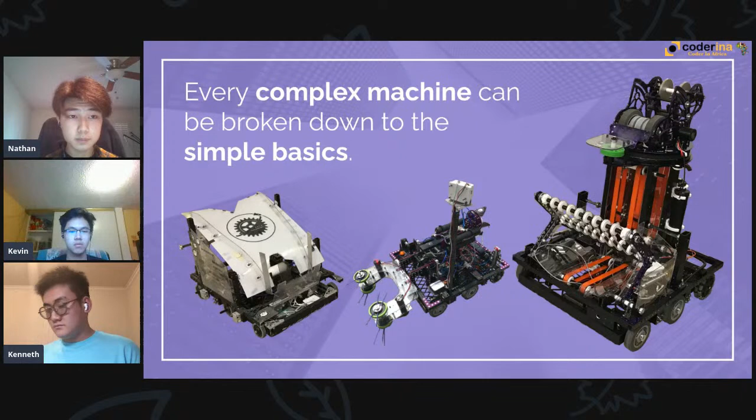Whenever we design our robots, we have to think about the basic mechanics of each robot. While these robots may seem really complicated at first, once we get the basic mechanics down, the rest of the process becomes a lot easier. So with that, I'll be talking to you guys about simple machines. Here's a short video of what one of our robots did last year. This robot was designed to shoot balls into a port.

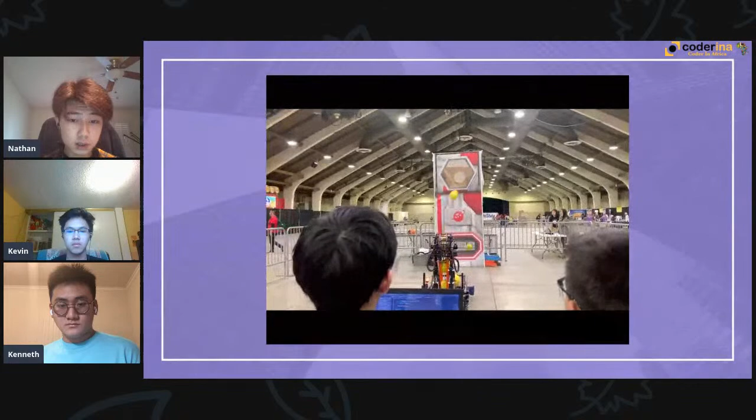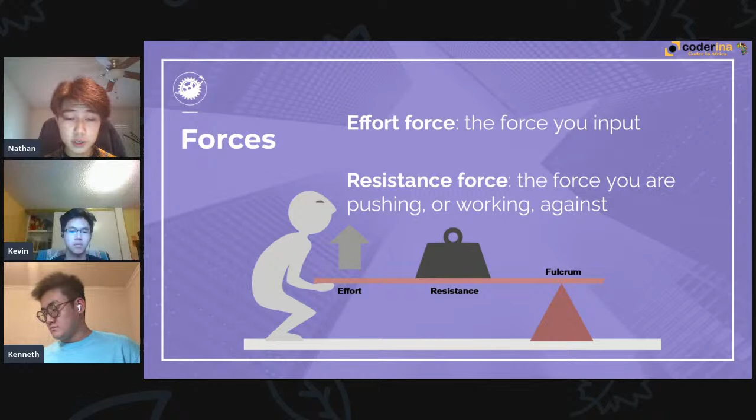We'll begin today's presentation by talking about forces. There are actually 2 kinds of forces. We have the effort force, which is any force that you put into a system, and the resistance force, which is the force that you are working against. In the picture below, the effort force is the person pushing up, while the resistance force is the weight pulling down on that person.

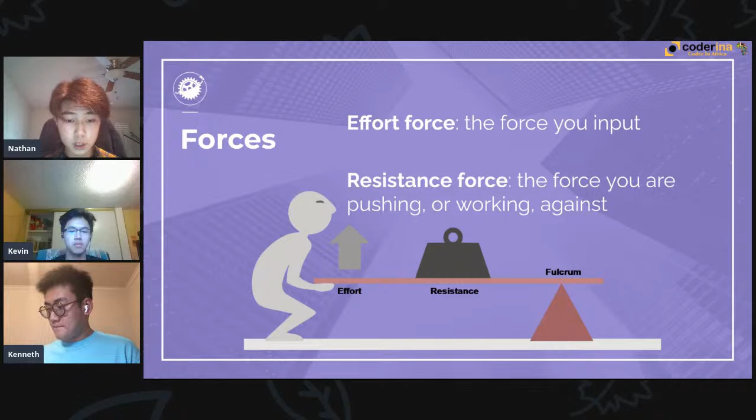We'll also talk about simple machines. Like Kenneth mentioned earlier, simple machines are the foundation to designing. Your door, your fan, those are all simple machines. They exist in everyday objects, and they're really important for our design process. Say you try to open your door where the handle is. That's pretty easy, right? That's what the door was designed to do.

But as you move your hand closer to the hinges, opening the door becomes much harder. That's what simple machines try to make easier. They make everyday tasks require a lot less force. Basically, they change the distance to change the direction or magnitude of the force required.

There are 6 kinds of simple machines: the lever, pulley, inclined plane, screw, the wedge, and last but not least, the wheel and axle.

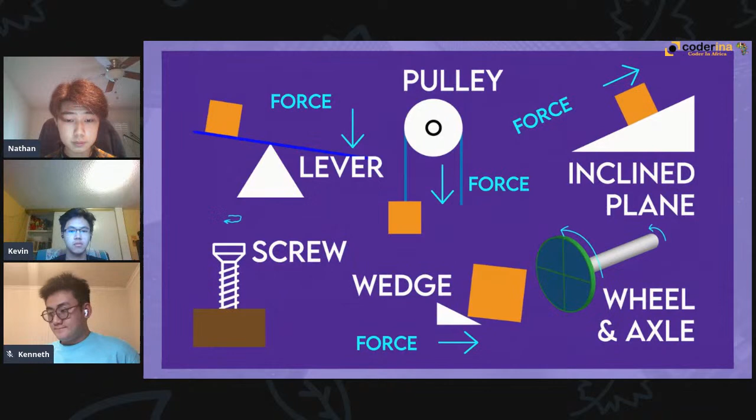And so work. What is work? Well, whenever you do something, you have to work to do it, right? Well, in design, work is simply the amount of force that you apply over a set parallel distance. And so in a simple machine, the work will never change. However, the amount of force or the distance needed to travel will change within work. So simple machines make it so that you can apply less force to make something happen while increasing the distance. And this makes it easier on the person using the simple machine to complete the task that they're trying to do.

And with that, we can now understand what mechanical advantage is. So mechanical advantage is basically a value or a number that tells you whether or not you're using more distance or more force when completing a task. A task has a set amount of work. So again, that amount of work will never change. But having a high mechanical advantage means that you're using less force, but increasing the distance that you need to travel to complete the same task. And vice versa, having a smaller mechanical advantage means that you are increasing the force needed to do something while decreasing the distance that you're traveling.

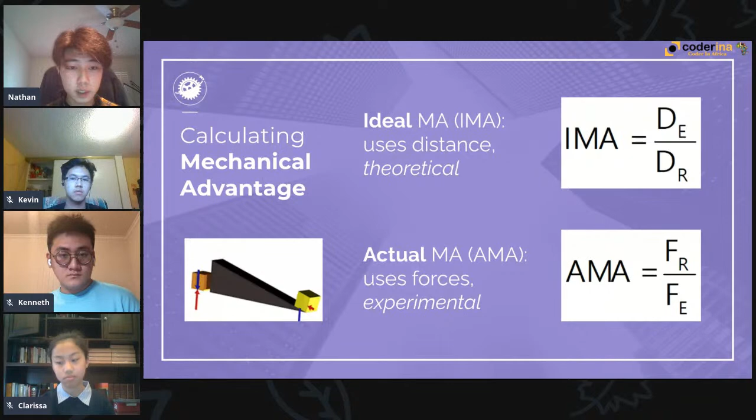And finally, like when I mentioned IMA and AMA earlier, we can actually use these two values to calculate the efficiency. So essentially, efficiency is just comparing how much work you put into something and how much work you get out of it. So it's like describing the amount of effort you put into making something work and how much of the effort that you put in actually gets contributed to your final result.

So let's think about it like boiling a pot of water. So if you pour some volume of water in a pot, you have that initial amount of water, right? After you boil the pot, some of the water will be evaporated and get lost in the air. So while your final result is that you still have a boiling pot of water, you won't have all the water in there that you initially poured in. So in the same way, it kind of works with energy, where not all the energy that you put in a system is contributed to the end result. So for any system, it's basically impossible to achieve maximum efficiency or 100% efficiency.

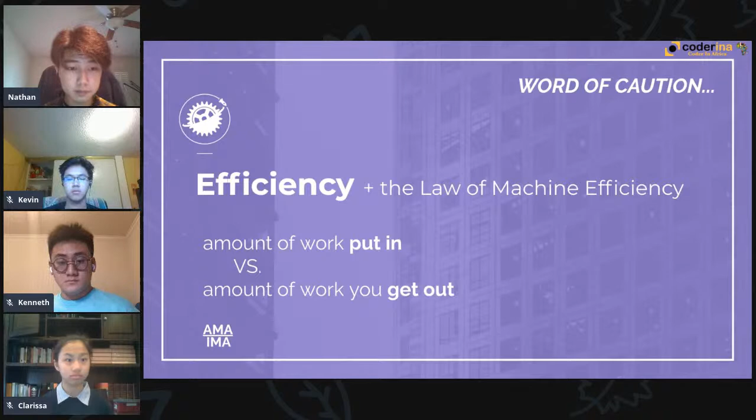Okay, hi guys, my name is Clarissa, and today I'll be going over the 6 types of simple machines with you, and Kevin will come in every once in a while to show you examples of simple machines on our robot. So to kind of recap, work is anything that you're trying to do. So like if you're trying to move a rock from one place to another place, that's an act of work. And mechanical advantage tells you, when you're doing a certain amount of work, will you be using more distance in the process or will you be using more force in the process? So it kind of tells you that comparison. But yeah, with that, let's get into it.

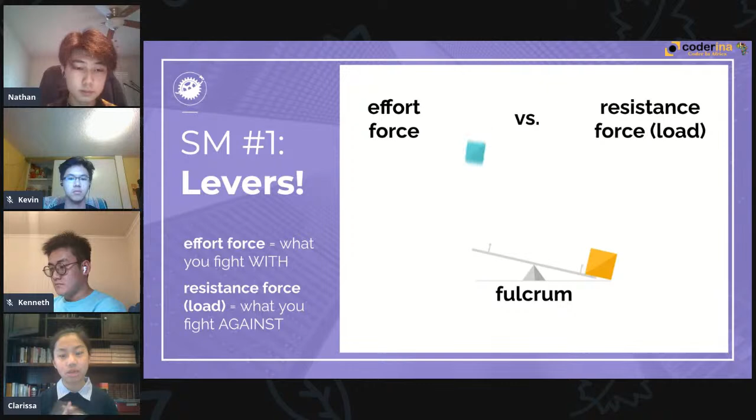So our first simple machine is levers. Levers come in 3 parts. You have your effort force, resistance force, and your fulcrum. A resistance force, in parentheses over there, is also called your load, because when you're carrying something, it's a load, right? So those 2 words are interchangeable. Our fulcrum in the center bottom is our pivot point of the lever. It's the point where the force kind of circles around in a lever. So if you remember, your effort force is basically the force that you will fight with, whereas your resistance force is the force you're fighting against.

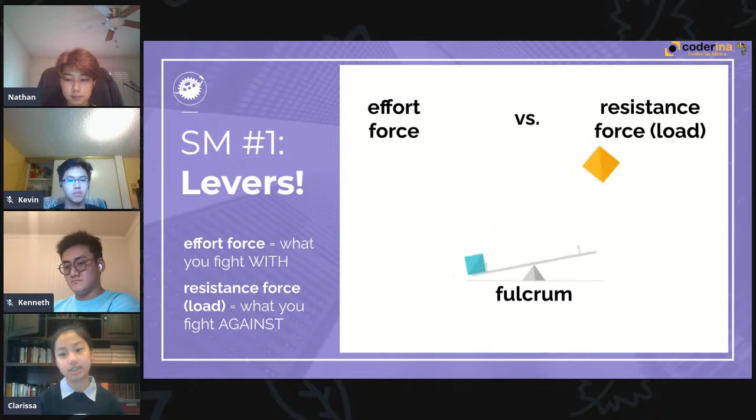So in the example of the little cute GIF in the middle, the blue and orange boxes are both effort forces and resistance forces. It just depends on the time they're slamming down or the time they're being lifted up. When they're slamming down, they're the ones putting the force on the system, so they would be the effort force. Whereas when they're being lifted up, they're providing resistance. They're the load, so that's the resistance force.

So next, we have our 3 types of levers: first class lever, second class lever, and third class lever. All these levers are based on the relative positions of the forces, and that sounds a bit complicated. So the way we like to think of it is just look at whatever part is in the middle. In the first class, you can see that the fulcrum is in the middle. In the second class, the load is in the middle, and in the third class, the effort is in the middle. I'm not sure if you guys can see the words, but red is effort, the fulcrum is the triangle, and the green is the load.

So what that means is not all levers are going to look the same, as you can see by the examples on the bottom, but you can kind of figure out what it is. So for the first class lever, again, the fulcrum is in the middle. And going back, mechanical advantage can be calculated as distance to your effort force compared to your distance to your resistance force. In this diagram, you have the fulcrum in the middle, your effort force on one side, and your load on the other side. Since it's calculated as distance to the points, mechanical advantage can really vary for a first class lever, because you can have your effort force really far away, or your load really far away. As long as you put one over the other, you calculate the mechanical advantage. So it's really variable for first class levers. It can change depending on where the forces are placed.

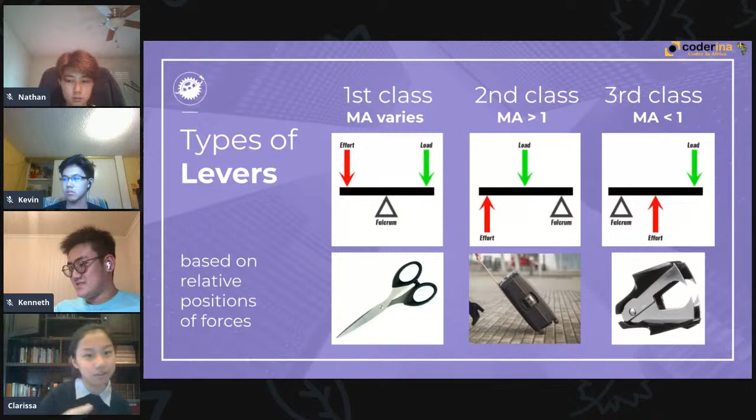So what that means is that for a certain amount of force, say you have like 5 pounds of something, then you'll probably need more than 5 pounds to carry that 5 pounds because you're closer to the fulcrum. You're trading more force for less distance to the fulcrum. Yeah, it's kind of like just a trade-off.

So now we're gonna be playing a quick game of guess the lever. So in the comments, I want you guys to just spam what you think the lever is.

And before we start, it's kind of helpful for you guys to draw a force diagram. So you might be asking, what's a force diagram? A force diagram is just a basic drawing that shows where the forces are acting on a system. So if you have a notepad or something you're taking notes on, you can draw a line on your paper to act as the wheelbarrow over here, and I'll help you out

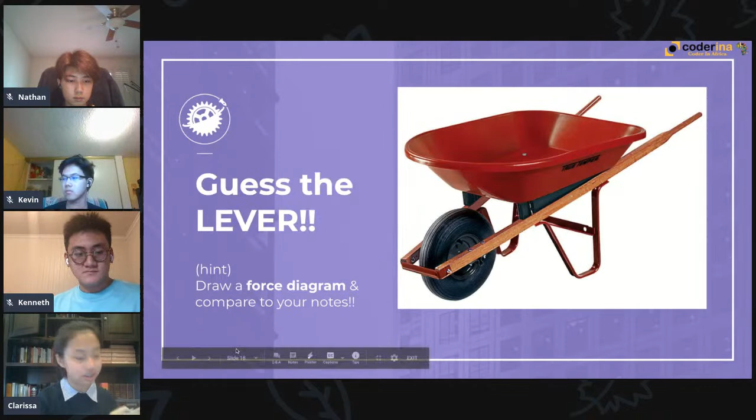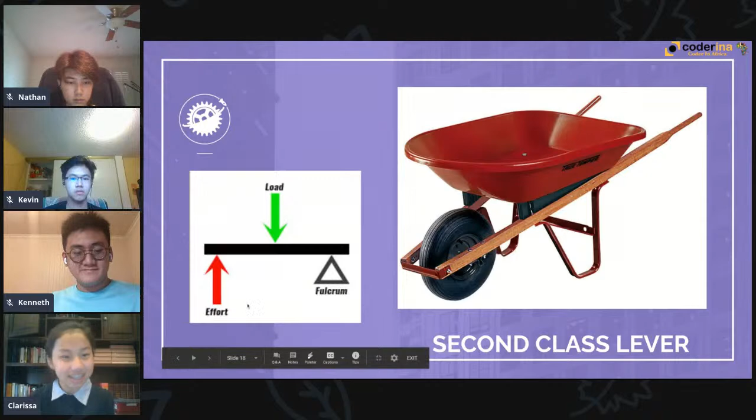for the first one. So in the first one, on the far left, you can draw a small triangle underneath the left of your line, and that will be your fulcrum because the wheel is the fulcrum. And in the center, you draw an arrow from the top because that's your load, and then on the right for the wheelbarrow, you draw an upwards arrow because that's your effort. Then you can label them effort, resistance, and fulcrum, and hopefully, based on your notes, you can infer that this is a second class lever. So yeah, I saw a lot of you got it right, so that's great. Okay.

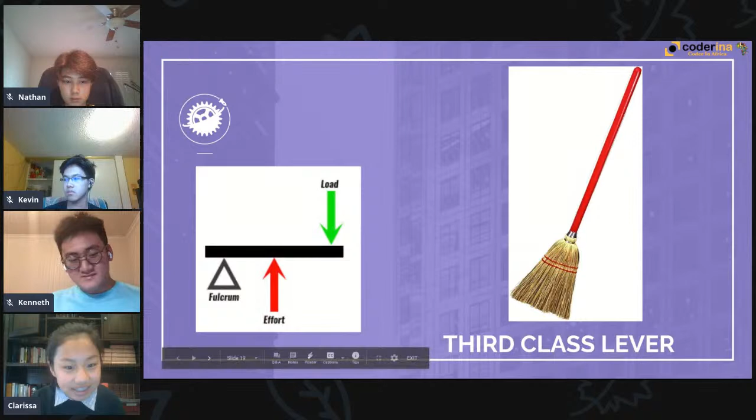Well, you guys can guess this one, or you might have already seen this. But guess what this is? The fulcrum is at the very top, the resistance force is at the very bottom, and the center is where your hands are, so that's the effort force. Yes, this is a third class lever. Okay.

A crowbar. Can any of you guys guess what this is? So for this one, you have your fulcrum at the very bottom, where the end of the crowbar is, and then you have your resistance force at the next corner, if you see the small corner leading up to it, and then you have your effort force at the very back where you're pushing down.

There's a lot of varied answers for this one. Some say third, some say first, and some say second. Interesting. Yes, but this is a second class lever. Make sure to compare it to your force diagrams, and you guys can always go back later.

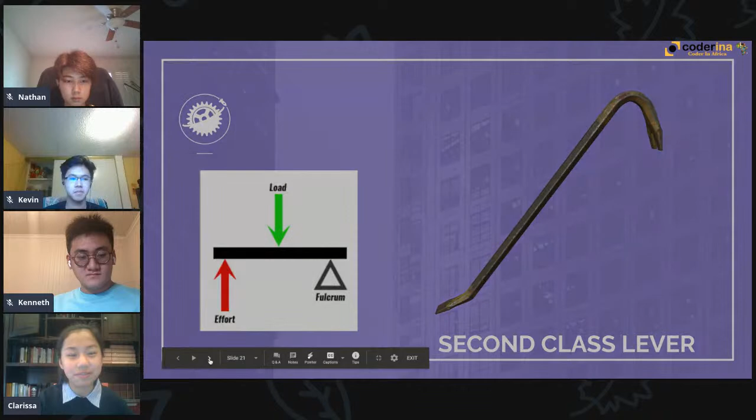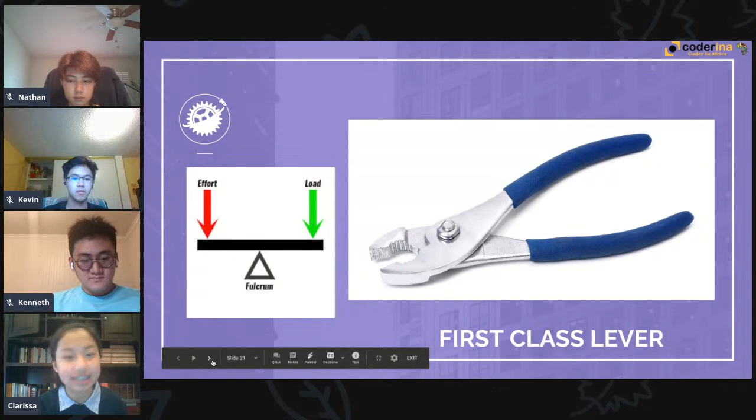Okay, this is one that we kind of mentioned earlier, but hint, hint, it's kind of like scissors, right, if you think about it. So you have your effort force on the right side, your resistance force on the left side, and the fulcrum in the middle, so this would be a first class lever. Hope you guys got it.

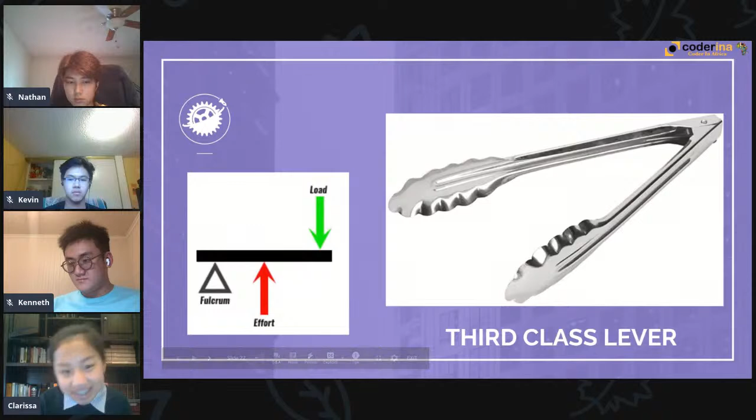Okay, well, this is our last one, and it's kind of tricky, but the fulcrum for this one is also at the very bottom of the fishing rod, and then where your hands are, that would be where your effort force is, and then at the top would be your resistance force, where you're pulling back your fish, right? So your center is the effort force.

Center is effort force. There's only one of them. That is a third class lever. So to all of you guys who got it right, congrats. To all you guys who are trying, there's a lot more examples out there, and it's a work in progress. Don't worry, it took me quite a while to absorb everything, so don't worry about it.

Okay, before we move on, there are two more technical definitions to add to your list. First of all is your torque definition. So torque is a force that creates rotation or torsion, which is a twisting force. So this kind of relates back to our lever because our lever, remember, has a fulcrum, so stuff can twist around it. So that's how torque relates back to it.

Moment is actually more broad than this. There are different kinds of definitions depending on where you apply this, but in context for what we're talking about today, moment is something that measures torque. Moment is calculated by distance times perpendicular force. And if you remember, work is distance times parallel force. So it sounds similar, but it's not.

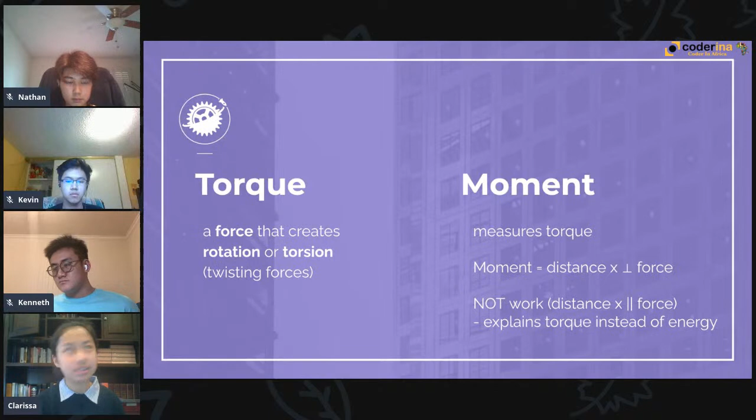Yeah, so moment explains torque, so a rotation force, right? Whereas work explains the process of doing something, right? Work is work. So work explains that process. So don't get them mixed up.

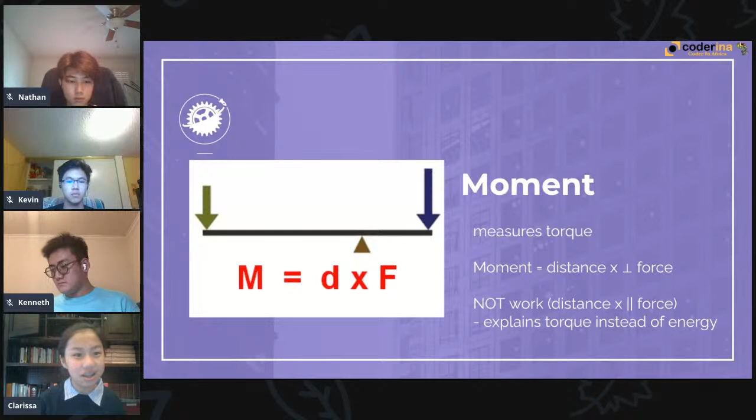If you can see by the diagram, moment equals distance times perpendicular force. So if you see the lever, it's a perpendicular force. If you guys don't know what perpendicular force is, it's 90 degrees. Yes. Hopefully that makes sense. Okay. Oh, and to the person in the comments wondering if that picture was a first class lever, yes, it was.

So our second simple machine, I mean, that was a lot, right? But we're only on our second simple machine, is the wheel and axle. I'm sure a lot of you guys are more familiar with this because we probably see wheel and axles in our everyday lives, right? So in a wheel and axle system, the axle is always the smaller rotating part. And then the wheel would be the bigger rotating part.

A wheel and axle system is based on the principles of a lever, if you can see by the picture on the left. So you see the pink arrow is the force from an axle, and then the blue arrow is the force from the wheel, right? So either you can drive the wheel and make the effort force that blue arrow, and the resistance force the pink arrow. Or you can flip it around and drive the axle. So in that case, the effort force would be the pink arrow, and the resistance force would be the blue arrow. So there's a lot of ways to play this out.

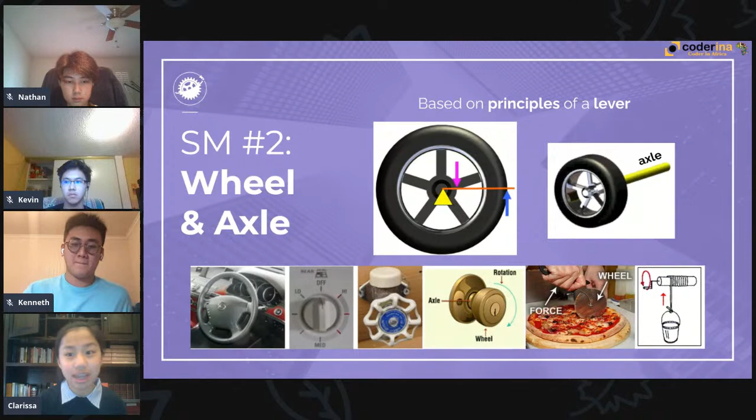So if you can see on the bottom, there's a lot of different examples of wheel and axle systems in everyday life, from a steering wheel to a doorknob, even to a pizza cutter. There's a lot of ways that it's used. But yeah, let's move on to calculating mechanical advantage for wheel and axle systems.

Okay, so again, for calculating mechanical advantage, you can use distance or forces, because if you remember what Nathan talked about earlier, ideal mechanical advantage uses distances, whereas actual mechanical advantage uses forces.

So our first one is when you're basing your wheel and axle off of a third class lever. If you use the picture on the left hand side, the effort force should be closer to the fulcrum than the resistance force. This kind of relates back to your force diagrams, right? So your effort force would be that pink arrow, and your resistance force would be the blue arrow.

So take our picture, the wheel, right? So in the wheel of a car or a truck or anything, you have the axle in the middle, driving the wheel. So the axle would be the effort force, and the wheel would be the resistance force, or more like the wheel touching the ground. That would be your resistance force.

You're fighting against that. Okay, so remember, third class lever is an axle driving the wheel scenario. That means the effort force has to be a lot more, because imagine trying to move a car, right?

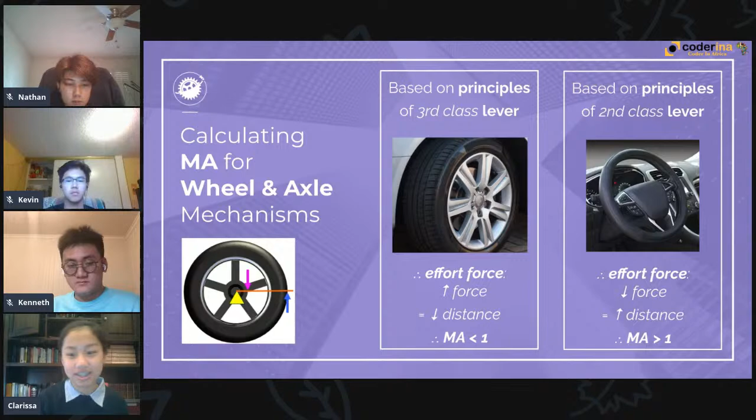And the mechanical advantage then is less than 1, because mechanical advantage is distance of your effort force over distance of resistance force. And next we'll have Kevin explain to you how we used wheel and axles on our 2019 robot.

This is our 2019 robot, JMH 3.0. As you guys can see, we use a wheel and axle system with the green wheels at the front of our robot. These wheels are driven by the axle, so they have a low mechanical advantage as we're spinning them with electrical motors. This allows us to spin the wheels really fast to help us take in and spit out the orange ball, as you can see on the right of the robot.

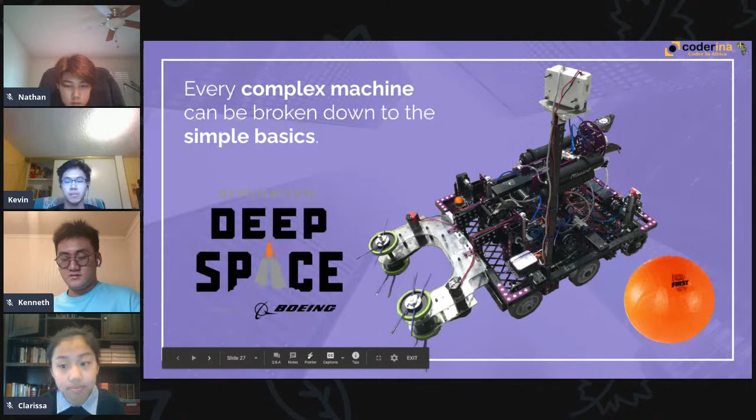Never mind. So the goal of this game, well, for the part where we use the balls, is just to put balls into those little goals. If you can see, there were low goals and high goals, but our team decided to be mostly adept with using the low goals. So if you can see, our robot is just trying to shoot balls into that goal.

So moving on, we're going on to our third simple machine, which is a pulley. A pulley is just a wheel with an inside groove to hold a rope. And the way pulleys are different is not only can they change mechanical advantage, which is the same as all the other simple machines we were talking about, but they can also change the direction of a force.

So just imagine a pulley and a rope going through it. If you pull down on one side, the other side will go up, right? So pulleys, for this reason, are often very useful, but they're often very inefficient as well. And what do you think the reason is? Oh, it's right there already. Well, the two reasons for inefficiencies in pulleys are friction and rope angle.

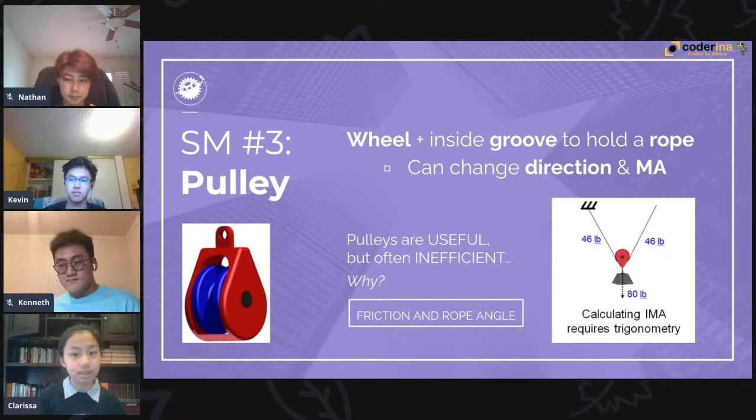So what that means is the force you should be putting in and the force you're getting out should be about the same. The distance you're traveling on one hand and the distance something else is traveling on the other hand should be the same. But remember, for pulleys, often it's kind of inefficient. So the force you're actually putting in and the force that you should have been putting in can be different. Oftentimes you'll be pulling harder than you would have to in a theoretical world, in an imaginary world.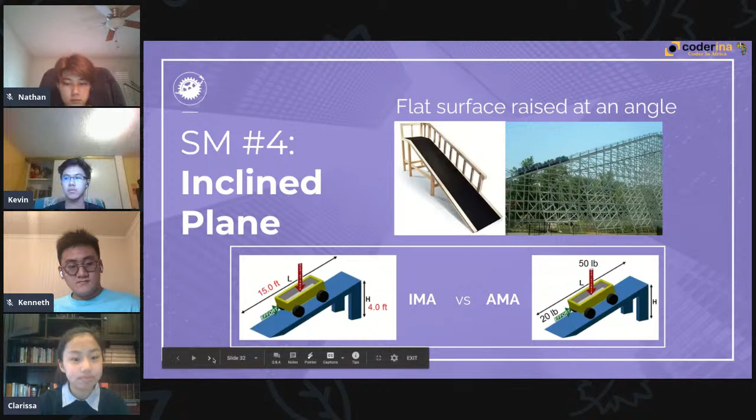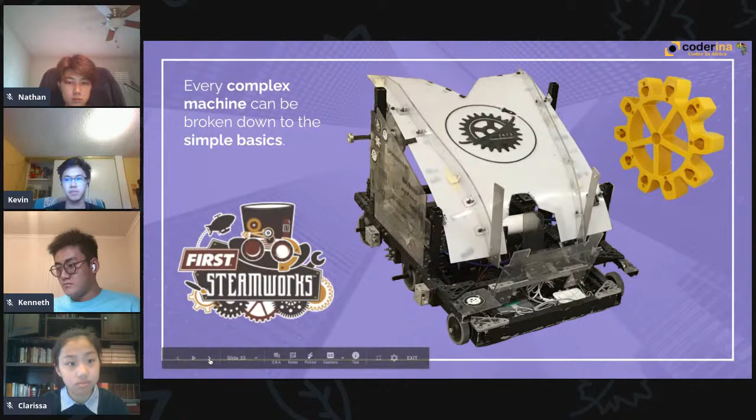This is our 2017 robot, JMH 1.0. This robot uses an inclined plane, which you can see with the white plastic on the top of the robot, to help us transport the gears, which are dropped on top of our robot, to the front of our robot, so we can travel quickly across the field without having to spend a lot of time trying to grab the gear. And here's a short video of that happening.

And our sixth and last simple machine is a screw. A screw is an application of the inclined plane and the wheel and axle. The inclined plane on a screw is the wrapping part around the cylinder. You can see it goes at an angle, whereas the wheel and axle is the motion that you do when you screw in something. You just kind of turn it around in a rotational motion, right? A circular motion. So this converts rotary motion into linear motion. Rotary motion is just a circular motion, whereas linear motion is a direct motion.

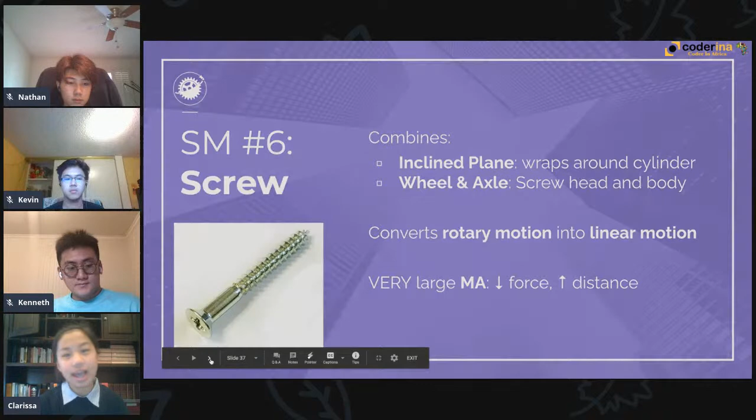And finally, we have compound machines. So a compound machine is a combination of any simple machine, really. The mechanical advantage of multiple simple machines put together is multiplied. So compound machines are very helpful.

Like for example, on our bot, it's a little more complex, but that's because we use compound machines. We put stuff together, and the reason mechanical advantage multiplying together is great is because you can increase your force drastically or increase your distance drastically when putting one and one together. But yeah, next we'll have Kevin.

And with that, we'll be moving on to different types of ways to transfer rotational force or torque. And we'll be starting with gears. Gears are circles with the teeth on the end of them that transfer torque, which is rotational force, by having the teeth on the gears meshed together.

A gear ratio is how fast one gear spins in relation to another. So for example, if you see the green and red gear, if it were a gear ratio of 2:1, the first gear would complete 2 whole rotations before the second gear completes 1. Next slide.

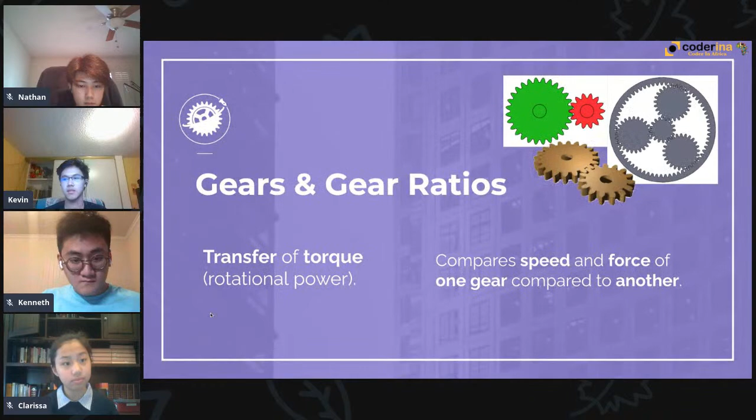And in order to calculate a gear ratio, there are important variables you need to know. The number of teeth each gear has, the diameter of each gear, the speed or angular velocity of each gear, and the torque.

Now, all these variables are interchangeable because you can calculate it using the equation at the bottom, where you divide the output gear and the input gear, and that would give you the gear ratio of any of these variables. With the only exception to this rule being speed, where you'd have to divide the input by the output instead of the output by the input.

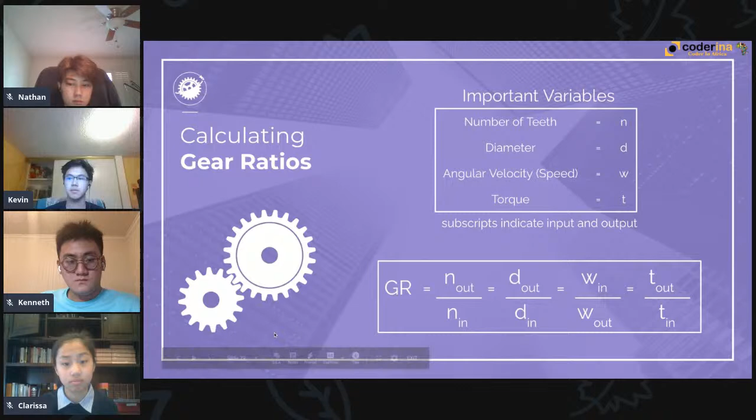When individual gears are put together, it creates a gear train. A gear train is a system of gears where the first gear transfers torque to the gear at the end of the gear train. The first gear in the system is known as a driver gear, as it's the gear that causes motion, while the last gear is the driven gear, as it's the gear being driven by the first one.

Every other gear in between the driver and driven gear are known as idler gears, and these gears are either used to help increase the distance between the first and last gear, as sometimes your input is not at the same location as your output, or you want to change the direction of your spinning gear.

As you can see in the image, when 2 gears are put together, they'll spin in opposite directions. However, if you want your input and output gear to spin in the same direction, you need an idler gear in between them.

Now, here's an example of a gear train with idler gears that our team has made. And so we use this gearbox to help our robot climb. And as you can see, the center gear is the driver gear, while the gears on the end are the driven gear.

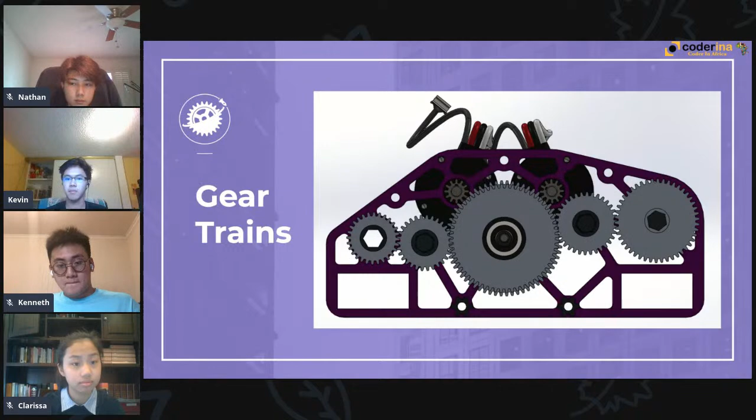A special type of gear train is known as a compound gear train. Similar to a compound simple machine, it multiplies the gear ratios so that the individual gear trains together either increase the speed or the torque of the system. In order to create a compound gear train, two gears must share the same axle. When gears share the same axle, they share the same speed.

For example, gear A is driving gear B, which is to make the speed lower as it has less teeth than gear B. And since gear B and C share the same axle, it makes it so that C also spins slowly despite having a small amount of teeth. And then a separate gear train from A and B would be gears C and D.

And this is a compound gear train because whatever input is put into gear A, the output of gear D will be affected by the individual gear ratios of each system.

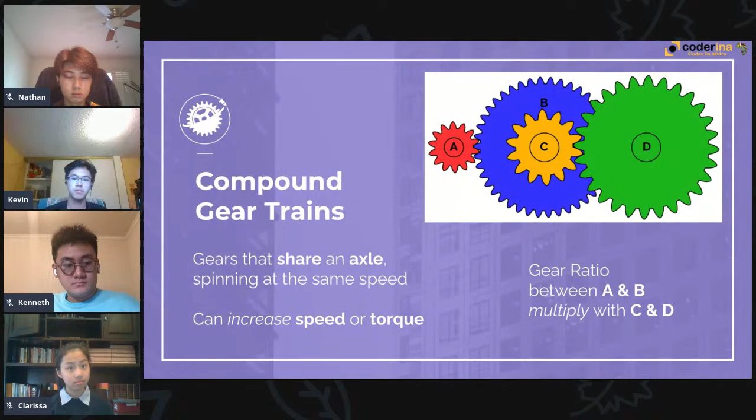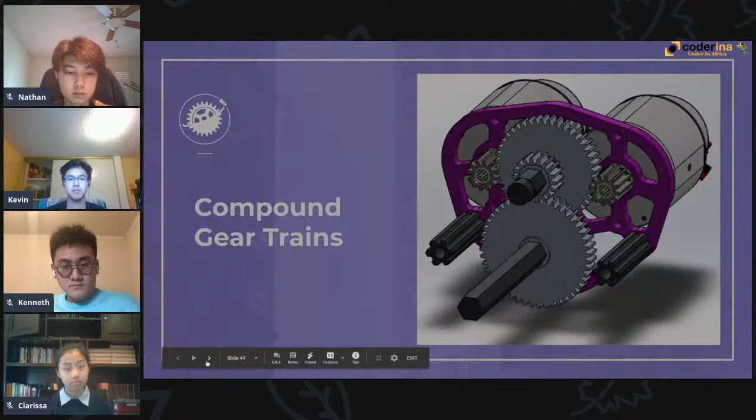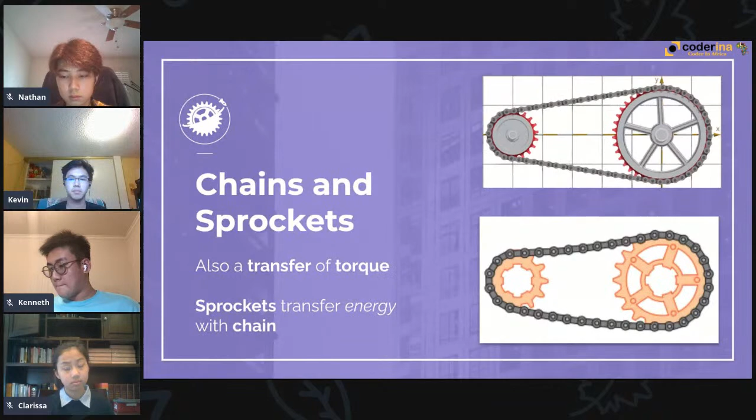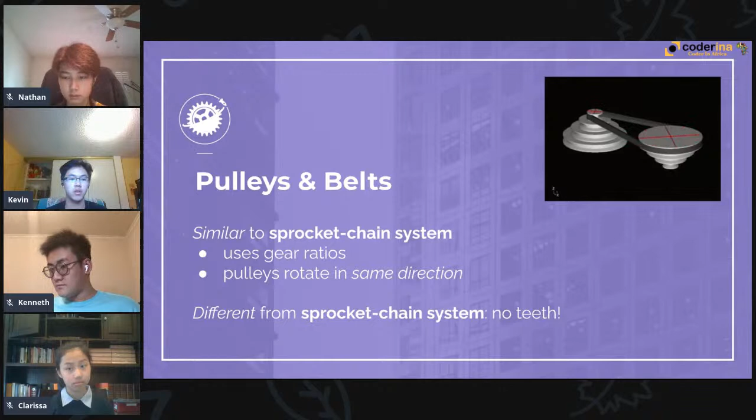A pulley and belt, on the other hand, is very quiet and there's no need for lubrication. However, a belt has a chance of slipping off the pulley, and belts only come in specific lengths. So it's hard to get a belt at the length you need unless you order it for that or design around it.

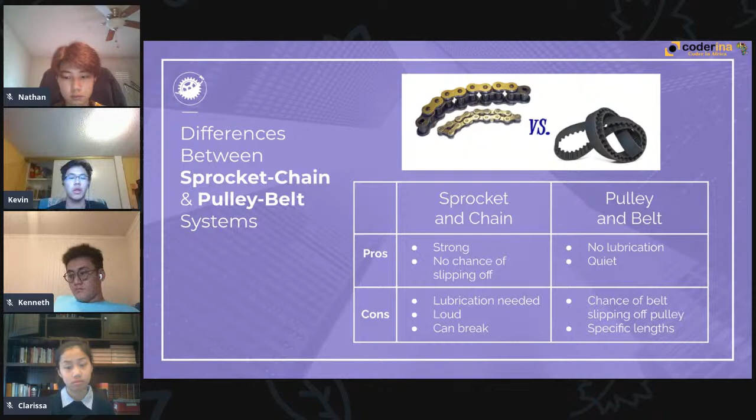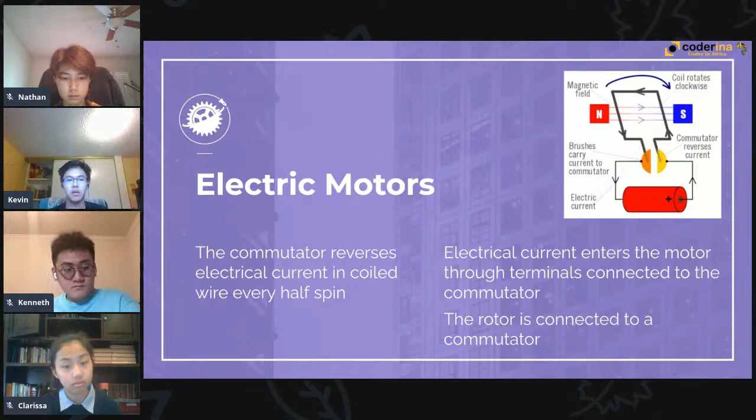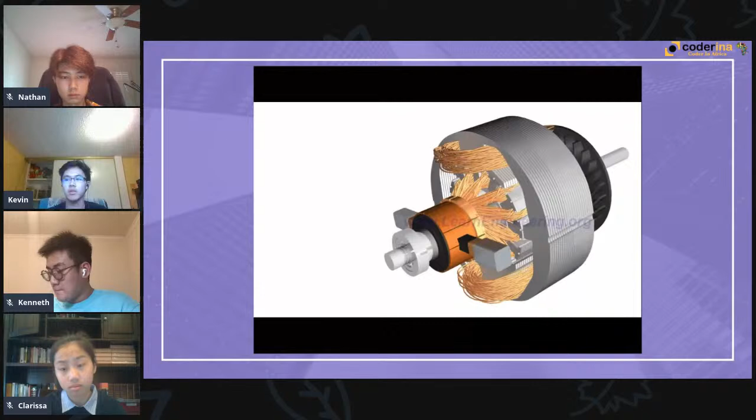Polarity is how attracted something is to a magnet, like its north and south ends. And so since the polarity changes every half rotation due to the commutator, the polarity helps keep the rotor spinning. We're gonna move on, and a video is gonna help show this, and we'll help explain it a bit further. As you can see, the rotor is a large amount of coiled wire which spins in between, and the outer shell is the stator.

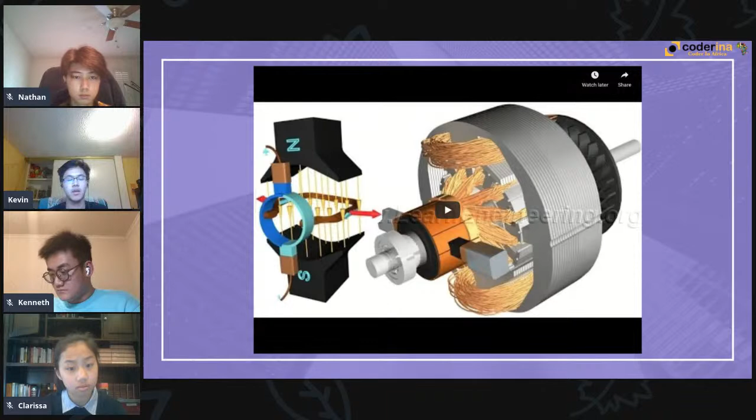You can see the polarity here working as the commutator changes the polarity, which changes the north and south ends of the wire. Since it's the magnet that surrounds the motor, the changes will constantly try to move away from similar types of attraction, and that's what keeps the motor constantly spinning, as long as there's an electrical signal being sent through.

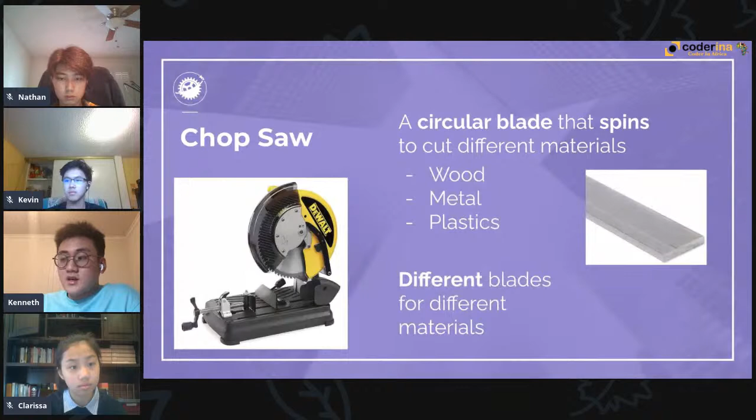Next, we'll talk about manufacturing tools and machines next time. We're out of time, unfortunately, but we'll actually talk about this, since it's important. It deals with manufacturing, so like fasteners, drills, bandsaws, chop saws. We'll talk about that in the Principles of Engineering lecture workshop.